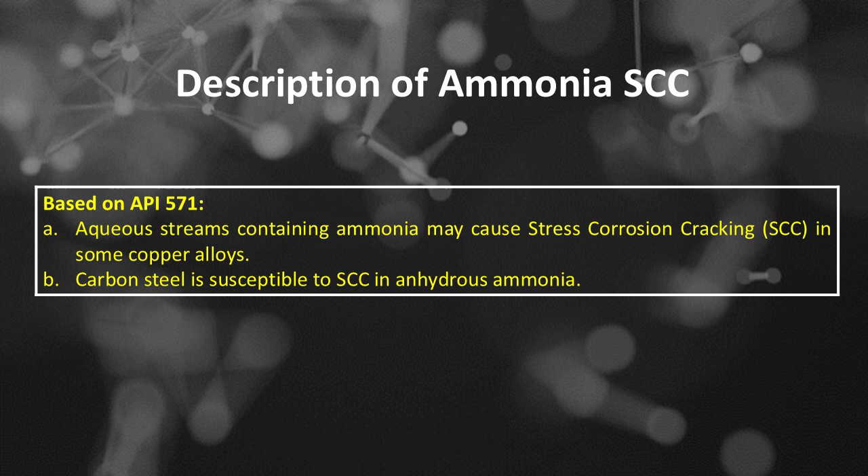Ammonia stress corrosion cracking, or ammonia SCC, damage. Introduction: Ammonia stress corrosion cracking is a form of environmentally assisted cracking that occurs in susceptible metals when exposed to ammonia-containing environments under tensile stress. It typically affects metals used in chemical processing, power generation, and other industrial applications where ammonia or related compounds are present. Mechanisms of ammonia stress corrosion cracking damage includes, number 1, environment.

Presence of ammonia, NH3, or ammonium compounds creates a corrosive environment. High pH conditions, an alkaline environment, facilitate ammonia's interaction with metal surfaces. Ammonia can penetrate crevices, weld zones, and deposit areas, creating localized corrosive environments.

Number 2, susceptible materials includes: A, commonly affected metals include carbon steels, low alloy steels, and certain austenitic stainless steels which are less susceptible but possible under specific conditions. B, more resistant materials include nickel alloys and some stainless steels with proper alloying elements. C, susceptibility factors: high residual or applied tensile stresses, presence of welds or heat-affected zones, and microstructural features such as grain boundaries.

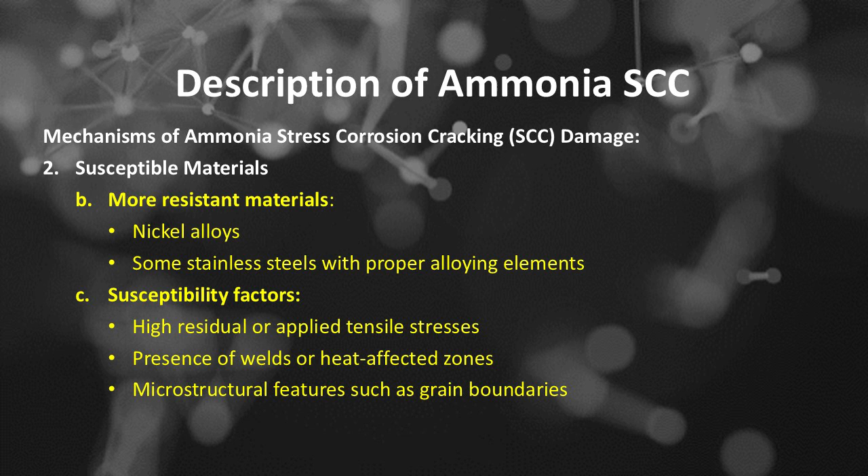Number 3 of mechanisms of ammonia stress corrosion cracking damage is the cracking process. A, cracks initiate at areas of high tensile stress, such as welds, bends, or residual stresses, and microstructural irregularities or corrosion pits act as crack initiation sites. B, cracks propagate along grain boundaries, intergranular, or transgranularly, facilitated by chemical attack.

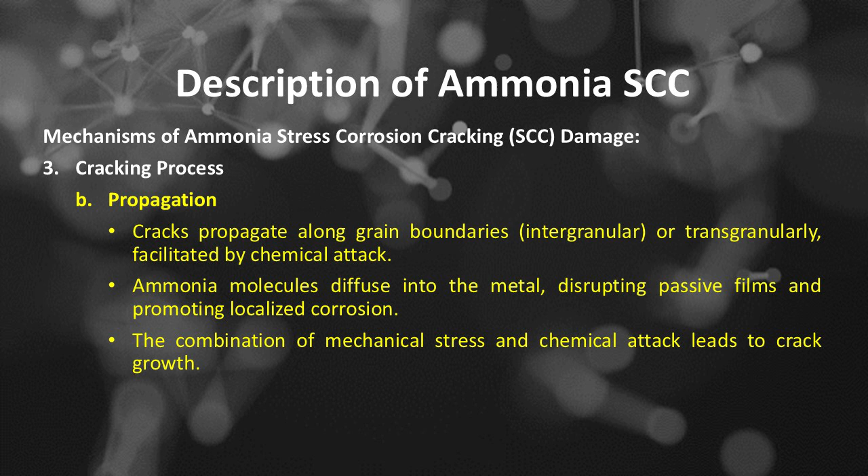Ammonia molecules diffuse into the metal, disrupting passive films and promoting localized corrosion. The combination of mechanical stress and chemical attack leads to crack growth.

Number 4, characteristics of ammonia SCC damage: crack morphology is typically intergranular, along grain boundaries, indicating an intergranular SCC mechanism. Cracks are often thin, brittle, and may have a faceted appearance under microscopic examination. Location of ammonia stress corrosion cracking damage often initiates in weld zones, crevices, or areas with residual stresses. Propagation tends to follow grain boundaries or microstructural features.

C, signs of ammonia stress corrosion cracking damage: evidence of grain boundary attack with corrosion products, presence of brittle intergranular cracks, and material thinning or localized deformation.

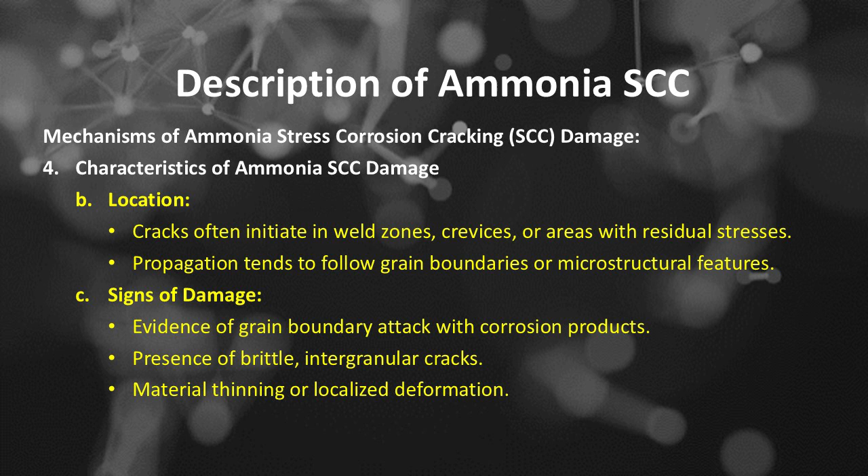Ammonia stress corrosion cracking is a hazardous, environmentally assisted failure mechanism characterized by intergranular or transgranular cracks initiated and propagated under tensile stress in ammonia-containing environments. The damage results from a combination of chemical attack, microstructural vulnerabilities, and mechanical stresses.

Prevention involves controlling water chemistry, selecting resistant materials, reducing residual and operational stresses, and implementing routine inspections to detect early signs of cracking. Ammonia stress corrosion cracking based on API 571, affected materials.

A, some copper alloys in environments with aqueous ammonia and/or ammonium compounds. B, carbon steel in anhydrous ammonia.

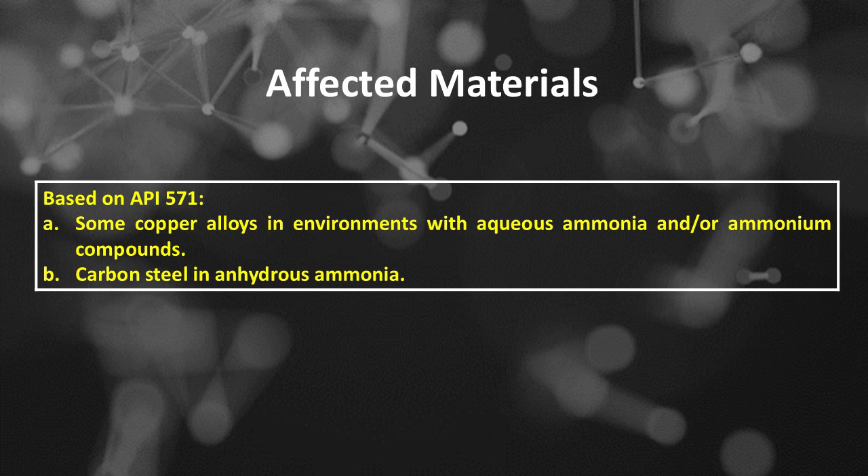Here's a detailed explanation of affected materials in ammonia stress corrosion cracking. Ammonia SCC primarily affects certain metals and alloys that are susceptible to chemical attack and stress-induced cracking in ammonia-rich environments. The susceptibility depends on the material's microstructure, composition, and environmental conditions. Materials affected by ammonia stress corrosion cracking.

Number 1, common susceptible materials includes: A, carbon steels. Widely used in piping, tanks, and structural components, composed mainly of iron with a carbon content typically below 0.3%. Carbon steel's susceptibility includes: highly susceptible to ammonia SCC, especially under tensile stress. Cracks often initiate at welds, heat-affected zones, or residual stress areas.

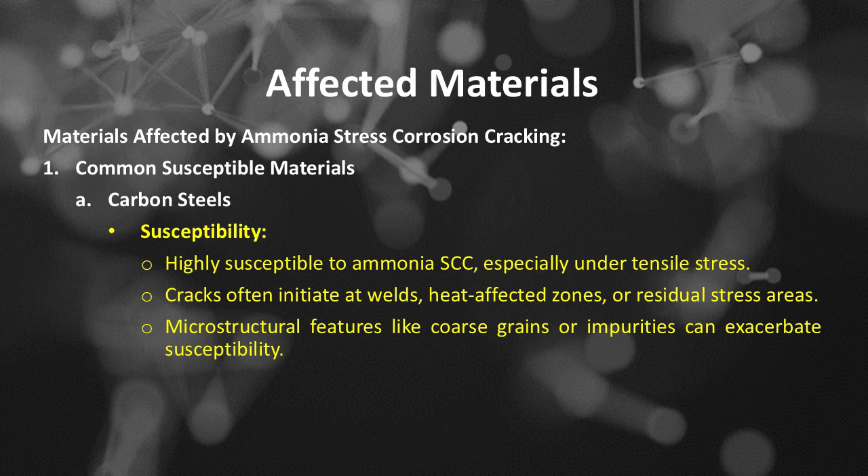Microstructural features like coarse grains or impurities can exacerbate susceptibility. Carbon steel's damage mechanisms includes: ammonia penetrates grain boundaries, leading to intergranular attack under stress. The passive film on steel can be disrupted by ammonia, promoting localized corrosion.

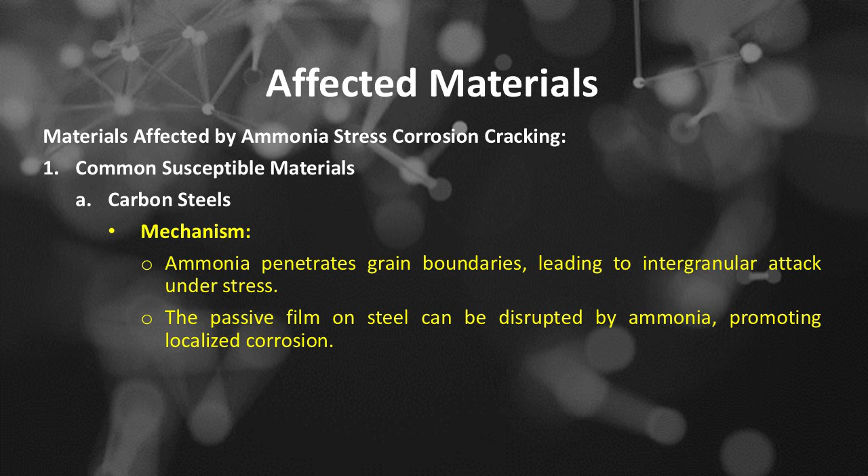B, low-alloy steels, for example chrome moly steels, such as 2.25Cr-1Mo, 3Cr-1Mo. The susceptibility of low-alloy steels includes: similar to carbon steels, but alloying elements may slightly modify resistance; generally more resistant than plain carbon steels but still vulnerable under high stress or ammonia concentrations.

C, austenitic stainless steels, for example types 304, 316, 321, 347. The susceptibility of austenitic stainless steels includes: less susceptible than plain carbon steels, however under certain conditions, high ammonia concentration, elevated temperature, or residual stresses, they become susceptible to ammonia SCC. Austenitic stainless steel's microstructural factors include sensitization, chromium carbide precipitation at grain boundaries, which can increase susceptibility.

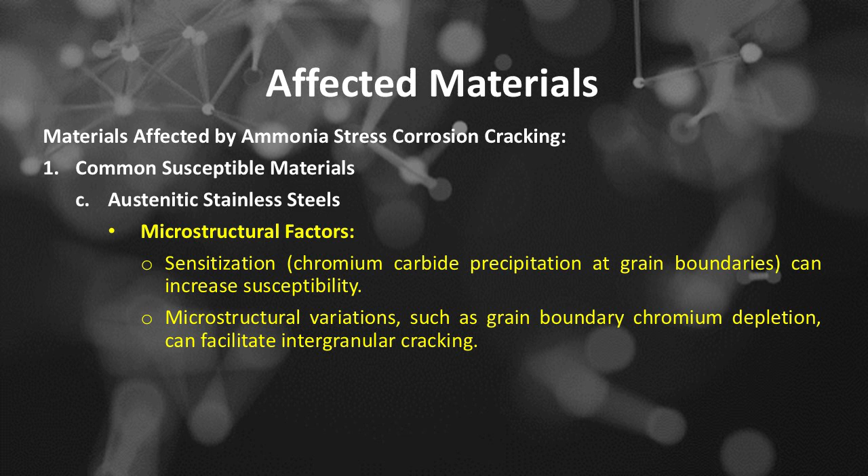Microstructural variations, such as grain boundary chromium depletion, can facilitate intergranular cracking. Common susceptible materials include nickel and nickel alloys, for example Inconel series such as Inconel 600 and 625.

Resistance of nickel and nickel alloys includes general resistance to ammonia SCC. The presence of nickel enhances corrosion resistance, making it suitable for environments with high ammonia concentrations.

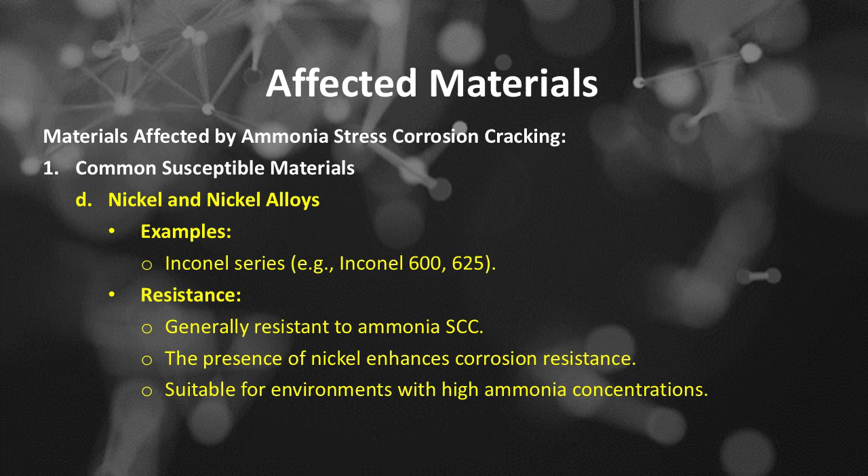Material microstructure and composition influences affecting ammonia stress corrosion cracking include, A, grain size. Fine-grained microstructures tend to be more resistant, while coarse grains can facilitate crack initiation and propagation along grain boundaries.

B, heat treatment state. Properly heat-treated materials with minimal residual stresses are less susceptible. Microstructural features like carbide precipitates can also influence susceptibility.

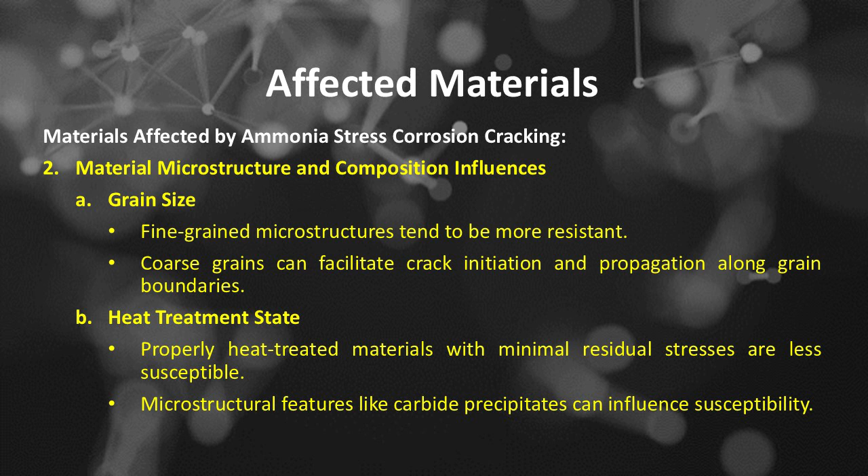C, impurities and microstructural defects. Impurities such as sulfur, phosphorus, or segregation at grain boundaries can weaken the material. Microvoids or inclusions act as initiation sites.

Environmental factors affecting material susceptibility include ammonia concentration, temperature, and pH, which influence the level of susceptibility of these materials.

Summary table: materials susceptible to ammonia SCC. Number 1 is carbon steel. It has high susceptibility; carbon steel is very vulnerable, especially under stress. In high ammonia environments, it corrodes rapidly. Implication: avoid using carbon steel in such conditions unless fully protected.

Number 2 is low alloy steels. It has moderate to high susceptibility. Susceptibility increases at welds and heat-affected zones, which are stress concentrators and weak points. Implication: requires strict welding quality control and inspection.

Number 3 is austenitic stainless steels. It has moderate susceptibility, generally better than carbon steel but not immune. Vulnerable when sensitized, such as by improper heat treatment. Implication: ensure proper fabrication and stress relief practices.

Number 4 is nickel alloys. It has low susceptibility, with excellent resistance in harsh environments, preferred for severe ammonia or corrosive service. Implication: higher cost, but long-term reliability.

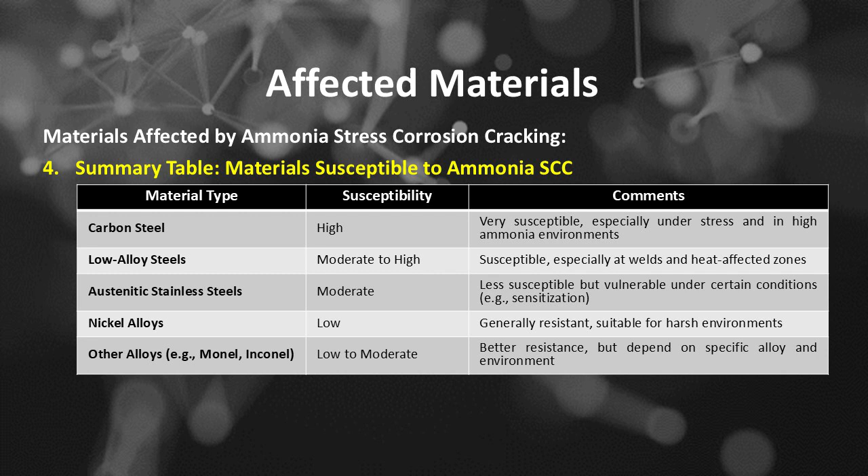Material selection is critical for components exposed to ammonia environments. Use of nickel-based alloys or specialized corrosion-resistant steels can significantly reduce susceptibility. Proper heat treatment, stress relief, and weld procedures help mitigate risks. Regular inspection and monitoring are essential for early detection of ammonia SCC in vulnerable materials.

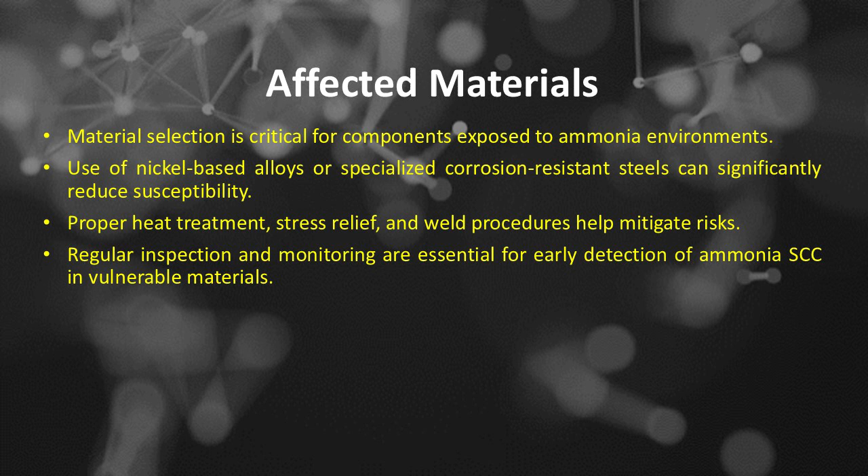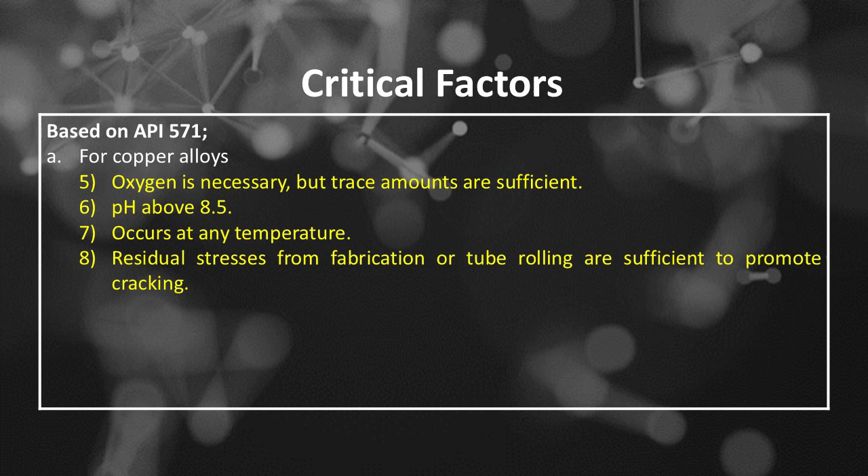Number 5, oxygen is necessary, but trace amounts are sufficient. Number 6, pH above 8.5. Number 7, occurs at any temperature. Number 8, residual stresses from fabrication or tube rolling are sufficient to promote cracking.

B, for steel, includes: number 1, anhydrous ammonia with less than 0.2% water may cause cracking in carbon steel. Number 2, cracking has been reported as low as -27 degrees Fahrenheit or -33 degrees Celsius in laboratory testing. Crack growth rates and cracking susceptibility increase with rising temperature and can occur at ambient or refrigerated conditions.

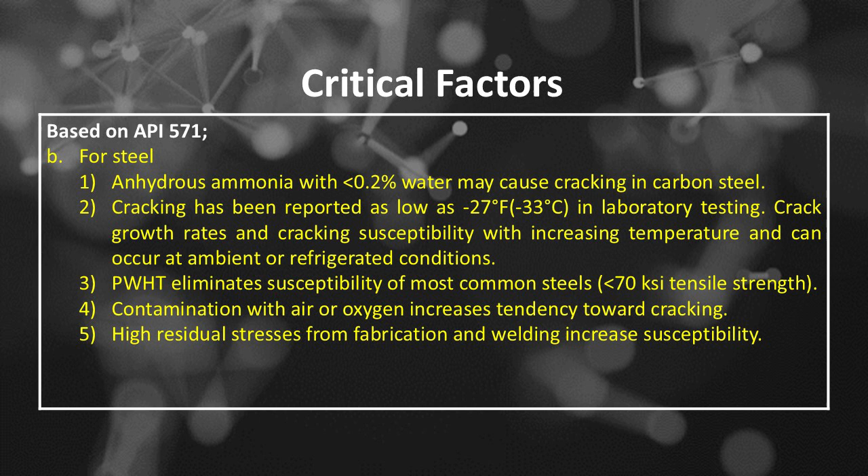Number 3, PWHT eliminates susceptibility of most common steels with tensile strength less than 70 ksi. Number 4, contamination with air or oxygen increases tendency toward cracking. Number 5, high residual stresses from fabrication and welding increase susceptibility.

Here's a comprehensive and detailed explanation of the critical factors that influence ammonia stress corrosion cracking damage. Ammonia SCC is a complex failure mechanism driven by a combination of environmental, material, and mechanical factors. The interplay of these factors determines the likelihood, initiation, and propagation of cracks. Understanding these critical factors is essential for prevention and mitigation.

Critical factors influencing ammonia stress corrosion cracking include, number 1, ammonia concentration and composition, A, ammonia content. High ammonia levels increase the aggressiveness of the environment. Ammonia molecules readily penetrate protective oxide films, disrupting passivity. Elevated ammonia concentrations, greater than several ppm, significantly raise the risk of SCC initiation and growth.

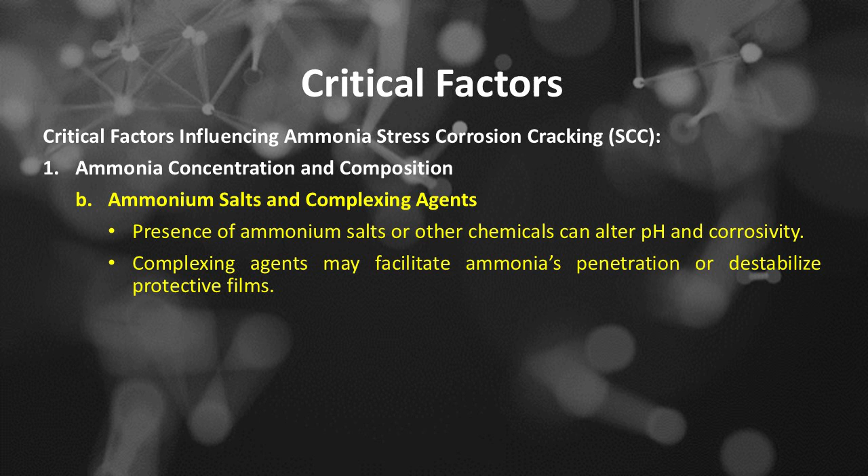B, ammonium salts and complexing agents. Presence of ammonium salts or other chemicals can alter pH and corrosivity. Complexing agents may facilitate ammonia's penetration or destabilize protective films.

Critical factors, number 2, temperature, A, elevated temperatures. Increased temperature accelerates chemical reactions, diffusion of ammonia into the metal, and crack propagation.

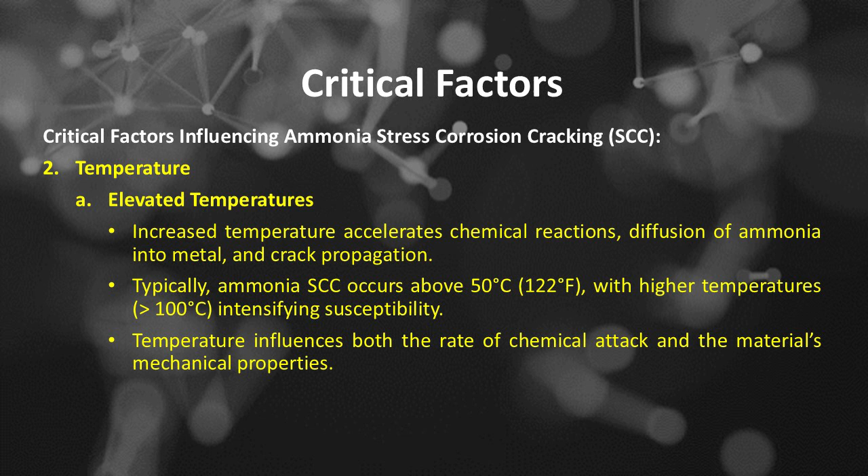Typically, ammonia SCC occurs above 50 degrees Celsius or 122 degrees Fahrenheit, with higher temperatures, greater than 100 degrees Celsius, intensifying susceptibility. Temperature influences both the rate of chemical attack and the material's mechanical properties. Thermal cycling: fluctuations in temperature can induce thermal stresses, exacerbating crack initiation.

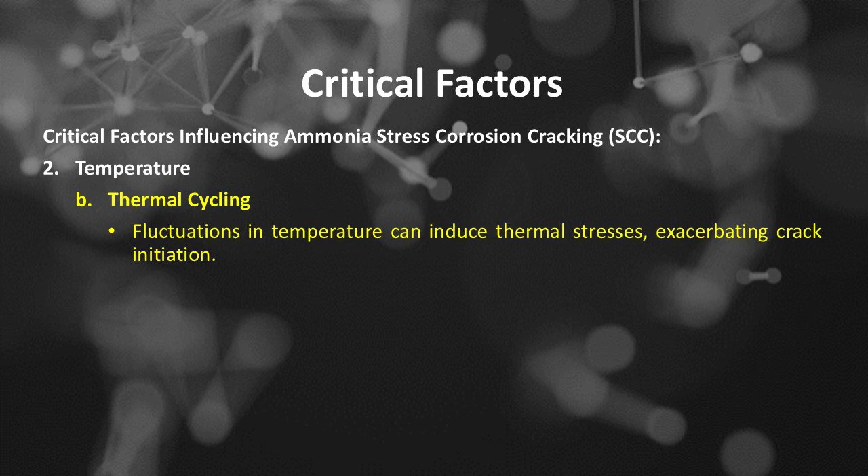Critical factor number 3 is mechanical stress, including tensile stress. Applied tensile stresses exceeding the material's yield strength, or residual stresses from fabrication, are critical. Even low levels of tensile stress can initiate cracks if environment and microstructure are conducive. Stress concentrations at welds, corrosion pits, or geometric discontinuities greatly increase local stress intensity.

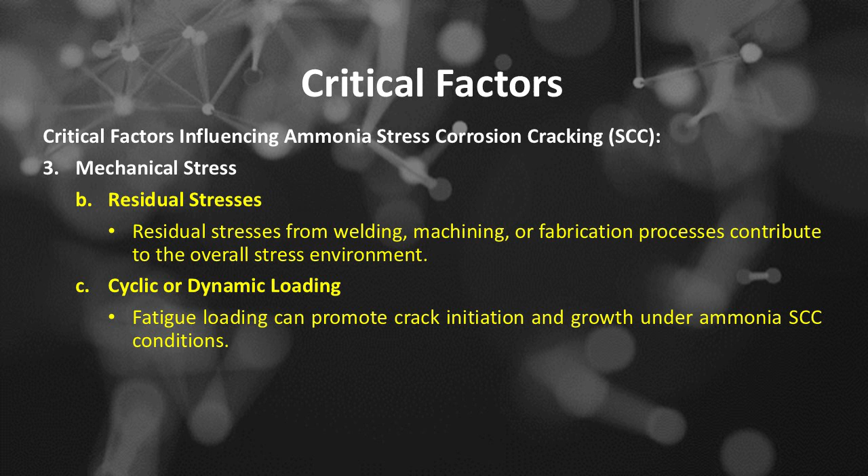Residual stresses from welding, machining, or fabrication processes contribute to the overall stress environment. Cyclic or dynamic loading: fatigue loading can promote crack initiation and growth under ammonia SCC conditions.

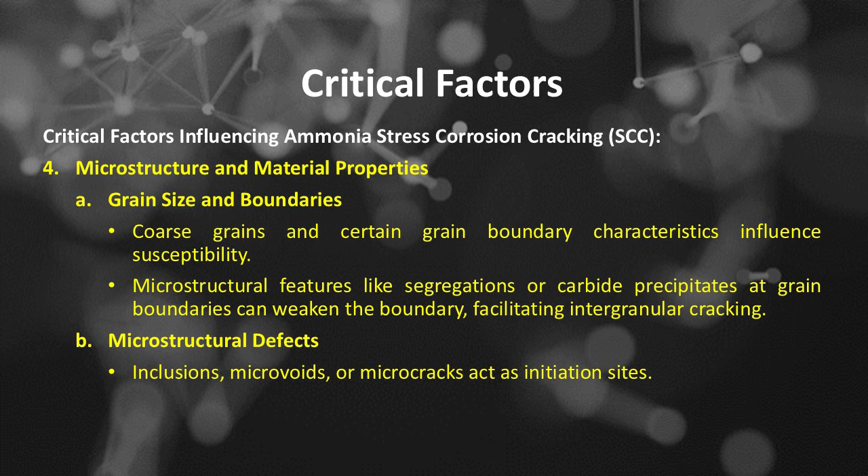Critical factor number 4 is microstructure and material properties, including grain size and boundaries. Coarse grains and certain grain boundary characteristics influence susceptibility. Microstructural features like segregations or carbide precipitates at grain boundaries can weaken the boundary, facilitating intergranular cracking. Microstructural defects, such as inclusions, microvoids, or microcracks, act as initiation sites.

Material composition: materials with certain alloying elements, such as high carbon or sensitization in stainless steels, are more vulnerable. Nickel alloys and austenitic stainless steels with proper microstructure are more resistant.

Critical factor number 5 is environment and water chemistry, including pH levels. Ammonia environments are typically alkaline, with pH greater than 8, which can destabilize passive films. High pH environments favor ammonia SCC.

Presence of oxygen or other gases: oxygen can influence corrosion processes, but in ammonia SCC, the environment is often low in oxygen. The absence of oxygen may promote more localized, intergranular attack.

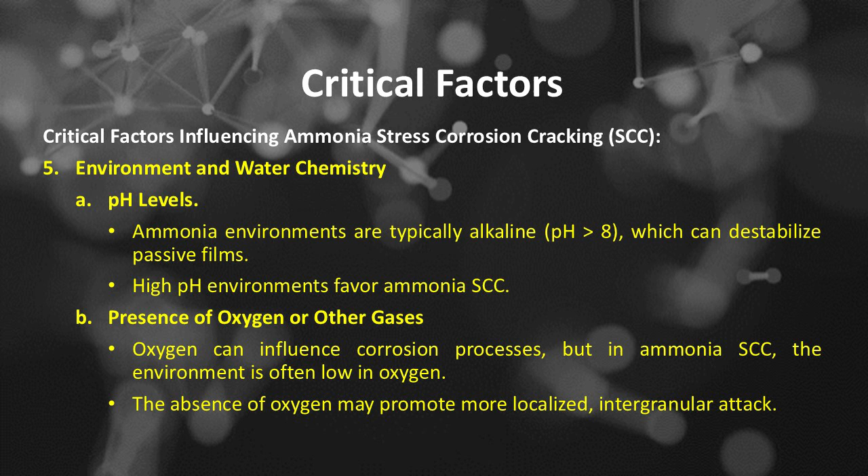Deposits and crevices: deposits or crevices trap ammonia, creating localized aggressive conditions. These microenvironments elevate the risk of crack initiation.

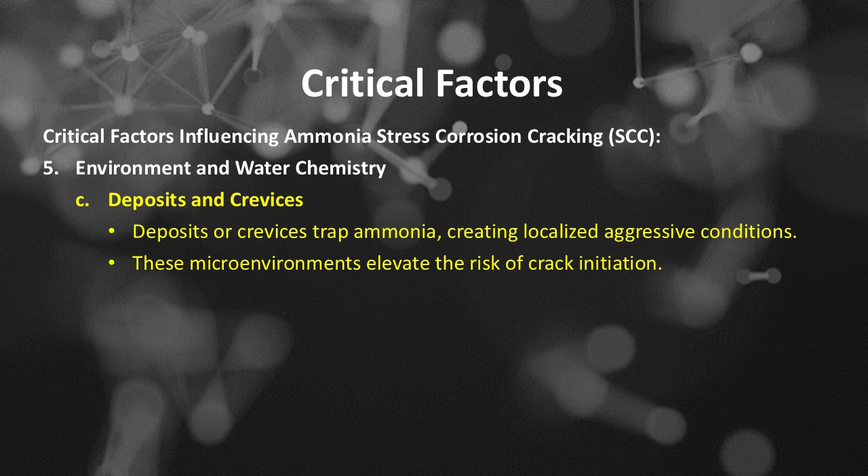Critical factor number 6 is environmental and operational conditions, including duration of exposure. Longer exposure times increase the likelihood of crack initiation and propagation.

Water chemistry control: proper control of ammonia concentration, pH, and temperature reduces risk. System design: avoidance of tight bends, welds, or residual stress zones minimizes stress concentrations and microstructural irregularities.

Critical factor number 7 is additional factors influencing ammonia stress corrosion cracking, including weld quality and residual stresses. Poor welds with high residual stresses are more prone to SCC initiation. Surface conditions: surface roughness, corrosion pits, or deposits increase initiation sites.

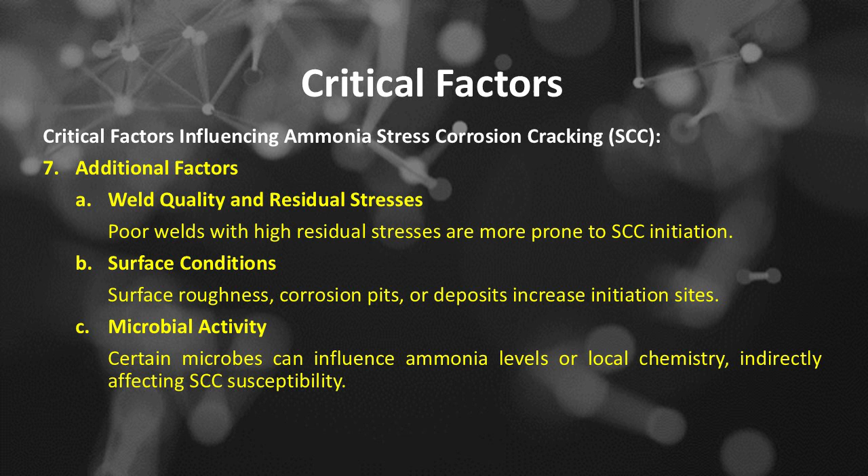Microbial activity: certain microbes can influence ammonia levels or local chemistry, indirectly affecting SCC susceptibility. The critical factors for ammonia SCC damage are interconnected; their combined effects determine the likelihood and severity of cracking. Controlling ammonia levels, managing stresses, selecting resistant materials, and maintaining proper system design are essential strategies to mitigate the risk of ammonia SCC.

Ammonia stress corrosion cracking damage affects units or equipment based on API 571: copper zinc alloy tubes in heat exchangers; ammonia present as a process contaminant in some services, or intentionally added as an acid neutralizer; and carbon steel used for ammonia storage tanks, piping, and equipment in ammonia refrigeration units, as well as some lube oil refining processes.

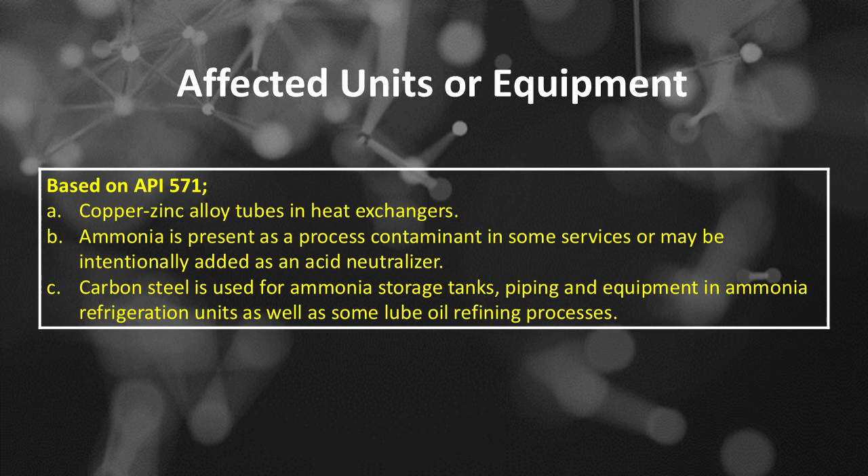Here's a detailed explanation of the affected units or equipment that are susceptible to ammonia stress corrosion cracking damage. Ammonia SCC can occur in various units and equipment within industries where ammonia is used, processed, or stored. The susceptibility depends on the operational environment, material selection, and design features.

Affected units and equipment in ammonia stress corrosion cracking include: 1) piping systems, including ammonia supply and distribution lines that transport ammonia from storage to process units. Vulnerabilities include stress concentration points at elbows, tees, or welds, and microstructural irregularities or residual stresses from fabrication. The impact: cracks initiating and propagating along the pipe walls, potentially leading to leaks or catastrophic failure.

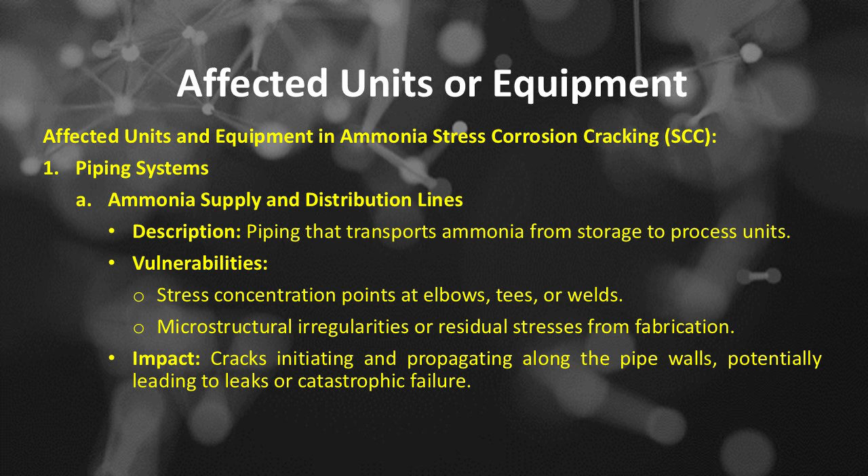Piping systems, number B, process piping: this is the piping involved in reactor feed, process loops, or heat exchangers. Vulnerabilities include elevated temperatures and ammonia concentrations, and cyclic stresses from thermal expansion. The impact would be localized cracking, especially near welds or bends.

Number 2 of affected units and equipment in ammonia stress corrosion cracking is storage tanks and vessels, including ammonia storage tanks.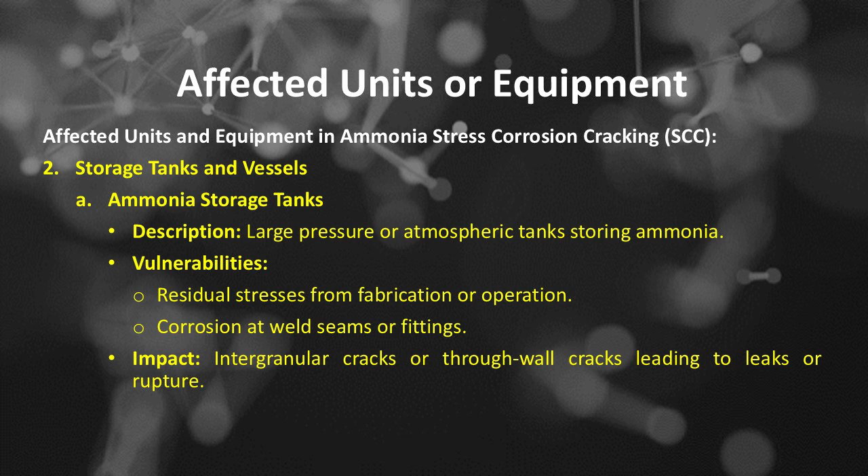Large pressure or atmospheric tanks storing ammonia. The vulnerabilities of these ammonia storage tanks include residual stresses from fabrication or operation, and corrosion at weld seams or fittings. The impact would be intergranular cracks or through-wall cracks leading to leaks or rupture.

Number B, reactor vessels, using ammonia in chemical processes. The vulnerabilities include high internal stresses during operation and microstructural conditions favoring SCC. The impact would be cracks affecting structural integrity and process safety.

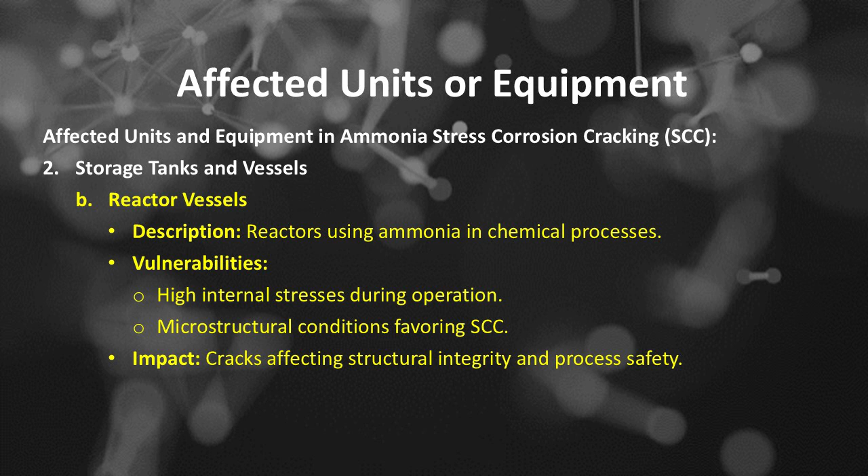Number 3 of affected units and equipment in ammonia stress corrosion cracking is shell and tube heat exchangers. This equipment transfers heat between ammonia and other process streams. The vulnerabilities include stress from thermal cycling and localized corrosion in crevices. The impact would be crack initiation at welds or tube attachments, risking leaks.

Number 4 of affected units and equipment is valves and fittings. These control ammonia flow, pressure-reducing devices, and fittings. The vulnerabilities include stress concentrations due to design features and microstructural irregularities from manufacturing. The impact would be cracks propagating from stress points, leading to leaks or failures.

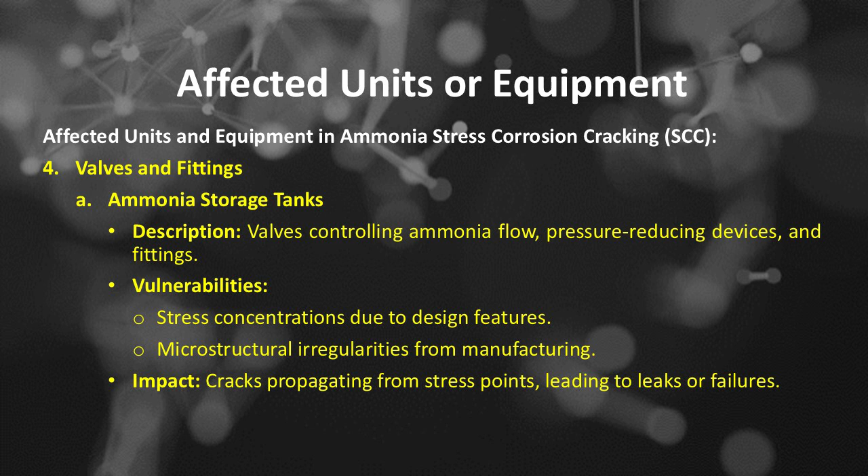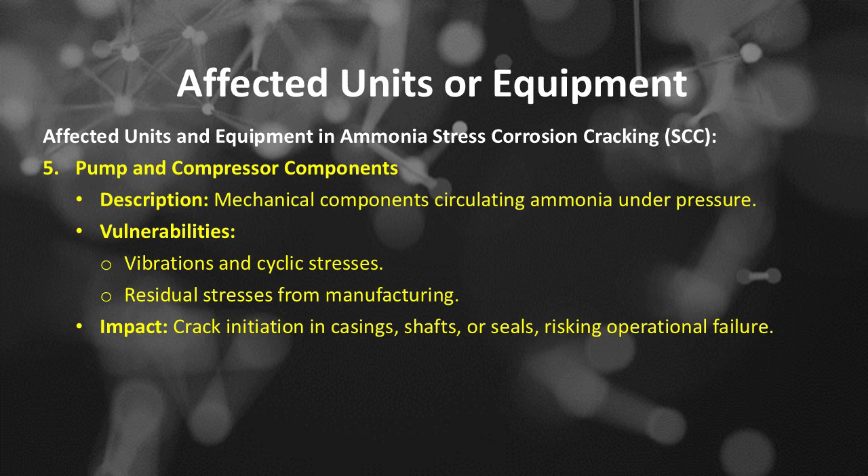Number 5 of affected units and equipment is pump and compressor components. These mechanical components circulate ammonia under pressure. The vulnerabilities include vibrations and cyclic stresses, and residual stresses from manufacturing. The impact would be crack initiation in casings, shafts, or seals, risking operational failure.

Number 6 of affected units and equipment is heat transfer surfaces and linings. These are surfaces in contact with ammonia, such as in scrubbers or absorbers. The vulnerabilities include surface corrosion due to ammonia exposure and microcracks from thermal or mechanical stresses. The impact would be progressive cracking leading to leaks or equipment failure.

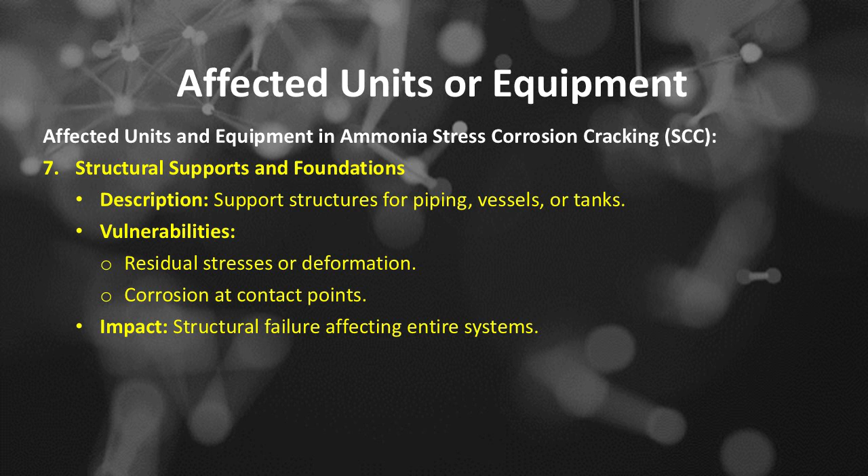Number 7 of affected units and equipment is structural supports and foundations, which support structures for piping, vessels, or tanks. The vulnerabilities include residual stresses or deformation, and corrosion at contact points. The impact would be structural failure affecting entire systems.

Key points: welded joints and stress concentration zones are common sites for ammonia SCC initiation. High temperature zones and areas with residual stresses are particularly vulnerable. Regular inspection, non-destructive testing (NDT), and material monitoring are critical for early detection.

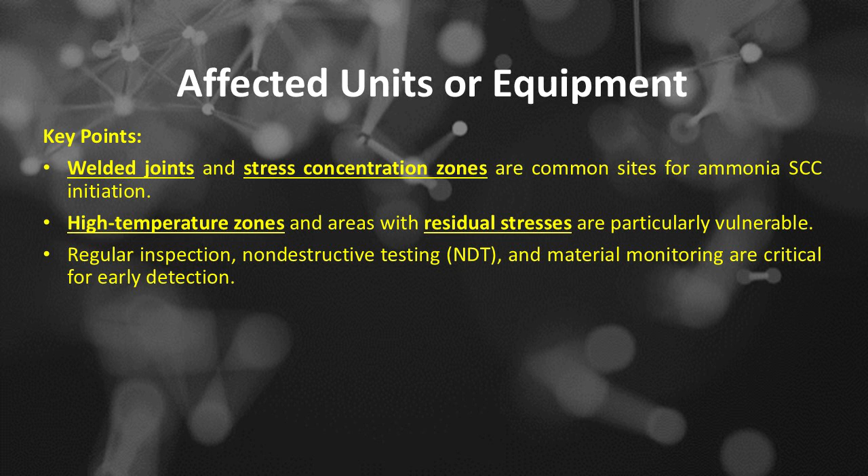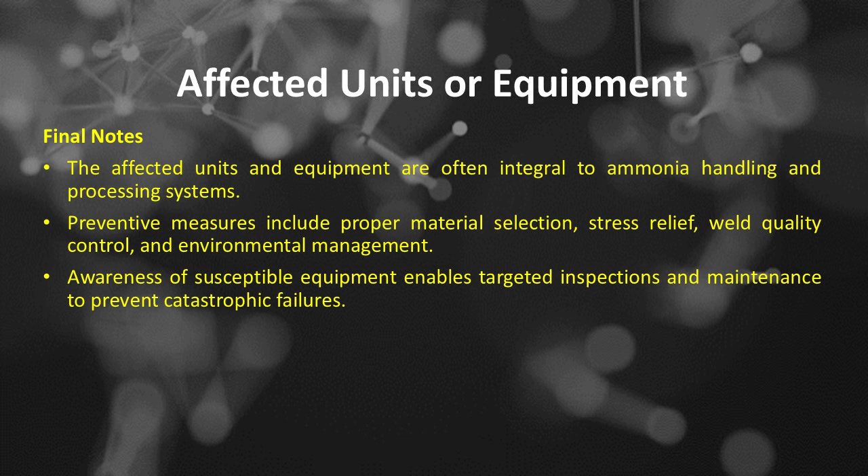Final notes: the affected units and equipment are often integral to ammonia handling and processing systems. Preventive measures include proper material selection, stress relief, weld quality control, and environmental management. Awareness of susceptible equipment enables targeted inspections and maintenance to prevent catastrophic failures.

Ammonia stress corrosion cracking appearance or morphology of damage based on API 571, number A, copper alloys, includes: number 1, surface breaking cracks may show bluish corrosion products. Number 2, exchanger tubes show single or highly branched cracks on the surface. Number 3, cracking can be either transgranular or intergranular, depending on the environment and stress level.

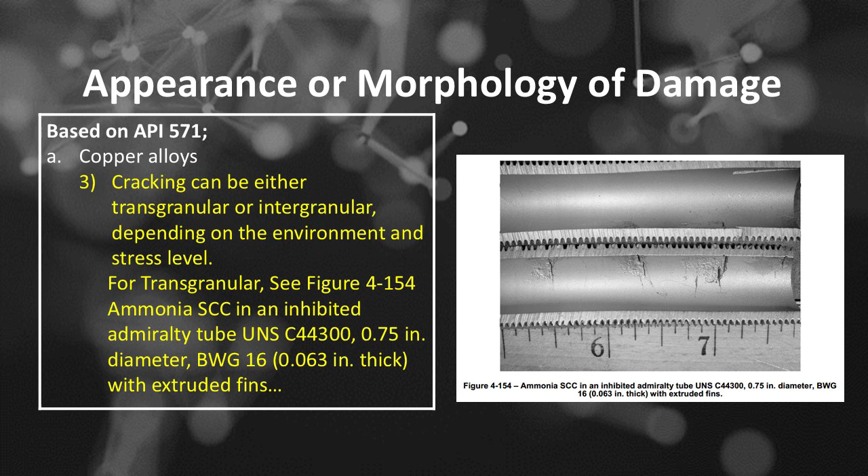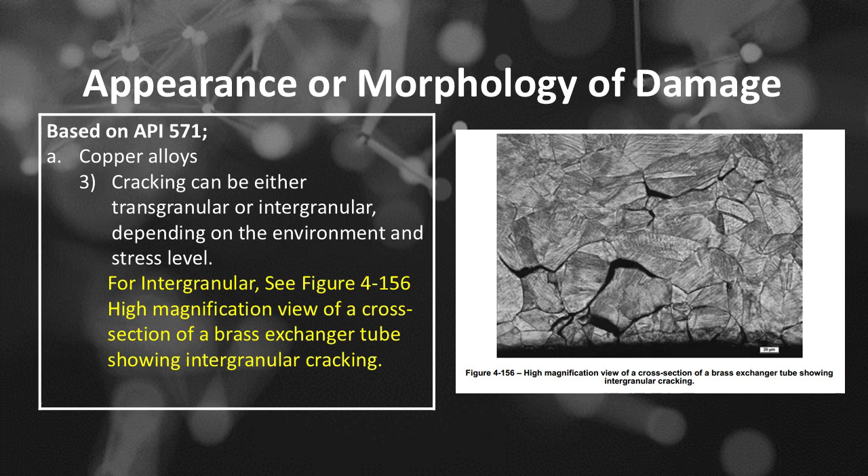Ammonia stress corrosion cracking critical factors based on API 571, number B, for carbon steel, includes: number 1, cracking will occur at exposed non-PWHT welds and heat-affected zones. Number 2, cracking is primarily intergranular in nature.

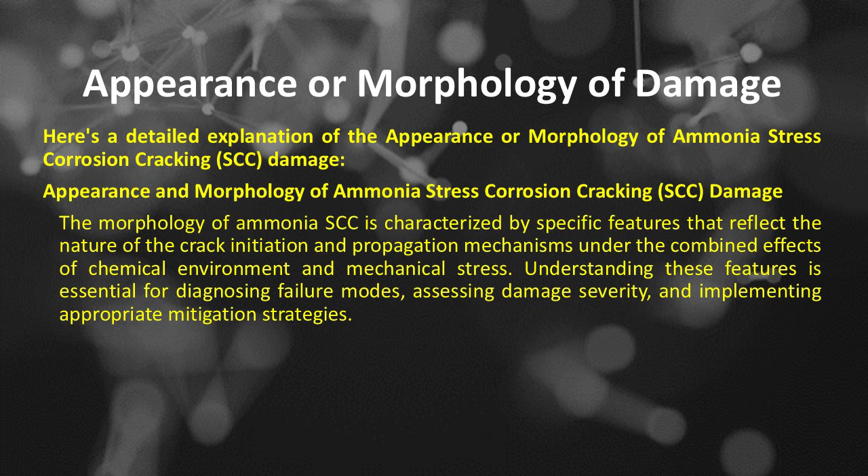Here's a detailed explanation of the appearance or morphology of ammonia stress corrosion cracking damage. The morphology of ammonia SCC is characterized by specific features that reflect the nature of crack initiation and propagation mechanisms under the combined effects of chemical environment and mechanical stress. Understanding these features is essential for diagnosing failure modes, assessing damage severity, and implementing appropriate mitigation strategies.

Appearance and morphology of ammonia stress corrosion cracking (SCC) damage includes: number 1, general morphological features, including number A, intergranular versus transgranular nature.

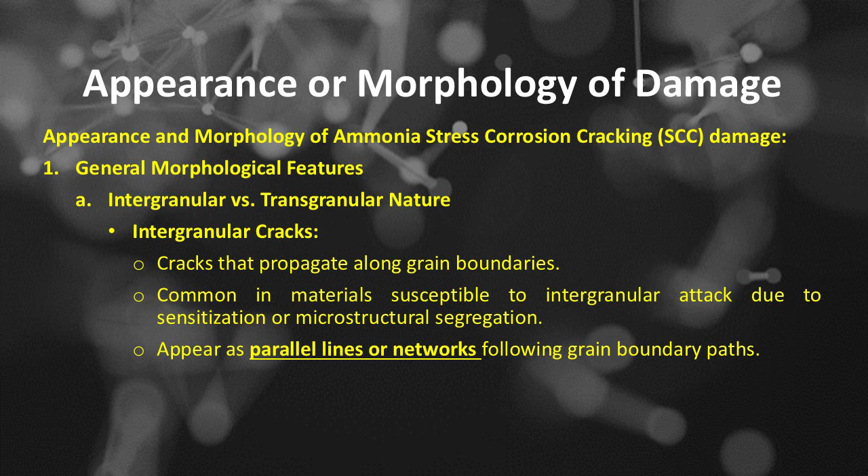For intergranular cracks, cracks that propagate along grain boundaries, common in materials susceptible to intergranular attack due to sensitization or microstructural segregation, appear as parallel lines or networks following grain boundary paths. For transgranular cracks, cracks that cut through grains, crossing grain boundaries, are less common in ammonia SCC but can occur under certain conditions, often appearing as rough, jagged cracks traversing grain interiors.

General morphological features: crack morphology. For brittle, cleavage-like appearance, cracks often exhibit a brittle fracture morphology, with smooth, flat facets indicative of cleavage or intergranular fracture. The fracture surface may be smooth and shiny, reflecting brittle failure.

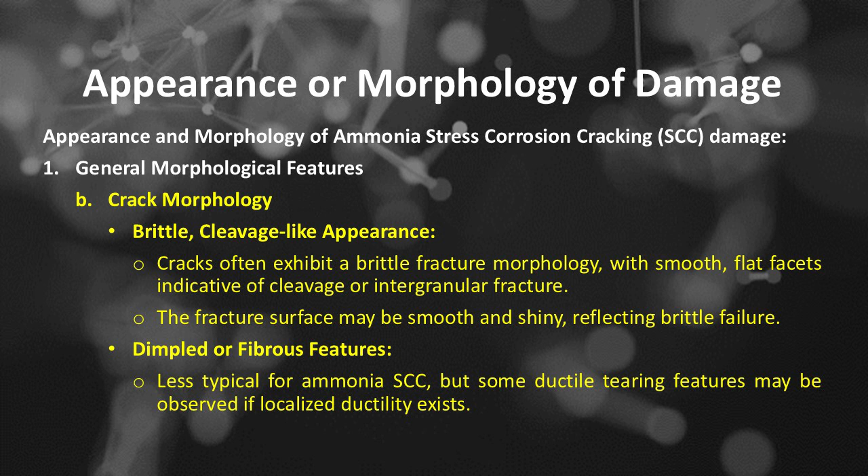General morphological features: crack morphology. For brittle, cleavage-like appearance, cracks often exhibit a brittle fracture morphology, with smooth, flat facets indicative of cleavage or intergranular fracture. The fracture surface may be smooth and shiny, reflecting brittle failure. For dimpled or fibrous features, less typical for ammonia SCC, but some ductile tearing features may be observed if localized ductility exists. This covers the appearance and morphology of ammonia stress corrosion cracking damage.

Number 2 is surface features of ammonia SCC. Number A, crack initiation sites, usually associated with microstructural irregularities, such as inclusions, carbides, or microvoids. Initiation may occur at corrosion pits or microcracks, often visible as small, localized damage zones.

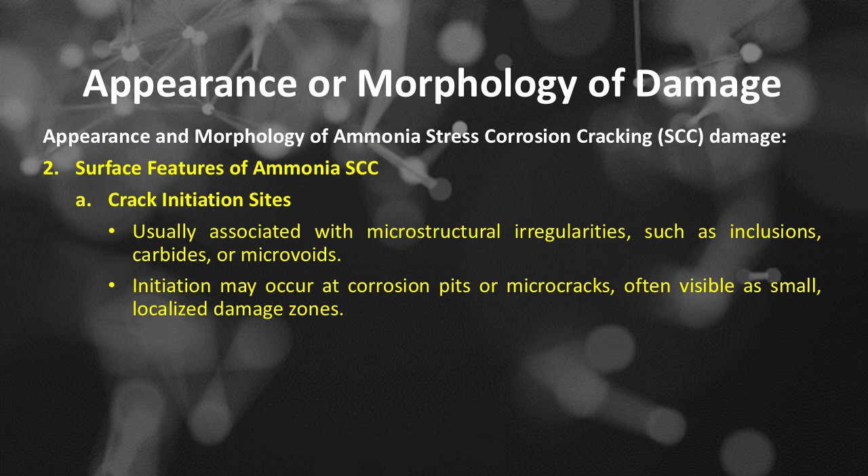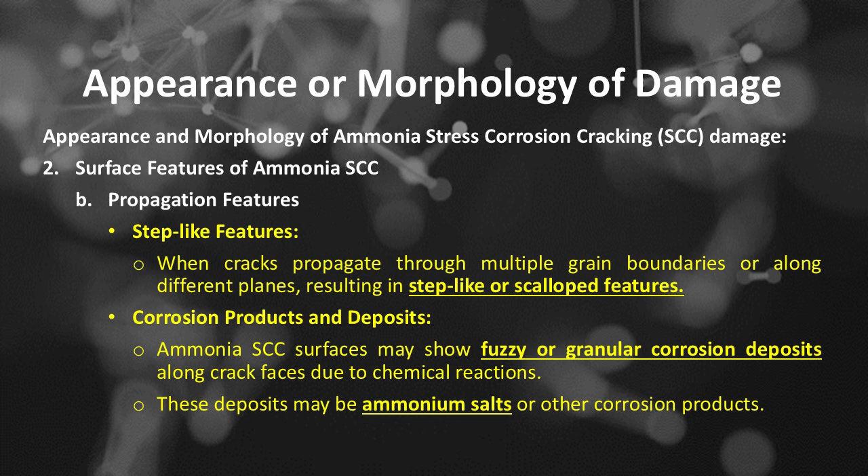Surface features of ammonia SCC. Number B is propagation features, includes flat, planar fracture surfaces, indicative of intergranular cracking, characterized by a smooth, mirror-like finish along the crack path. For step-like features, when cracks propagate through multiple grain boundaries or along different planes, resulting in step-like or scallop features. And for corrosion products and deposits, ammonia SCC surfaces may show fuzzy or granular corrosion deposits along crack faces due to chemical reactions. These deposits may be ammonium salts or other corrosion products.

Appearance and morphology of ammonia stress corrosion cracking damage. Number 3 is microstructural morphology, includes, number A, crack path, often follows grain boundaries, resulting in intergranular crack paths. The crack may branch or bifurcate along different grain boundary planes. Number B, fracture surface exhibits features characteristic of brittle fracture, a faceted appearance with smooth cleavage facets, and the presence of intergranular cracks with step-like features at grain boundaries.

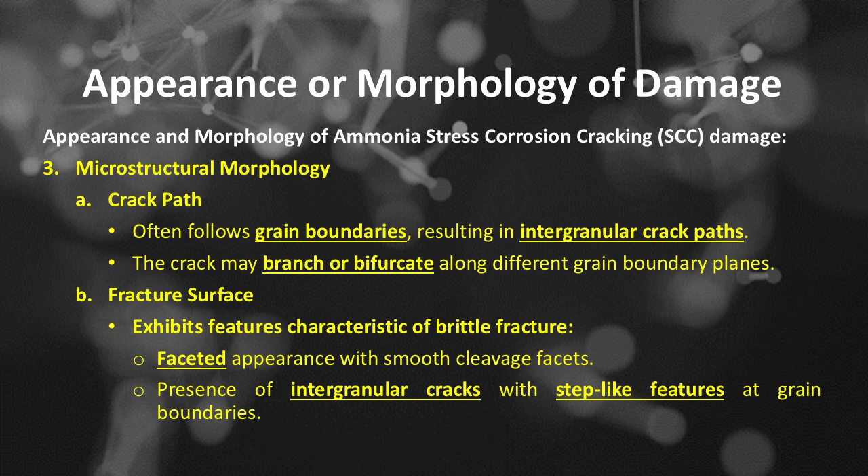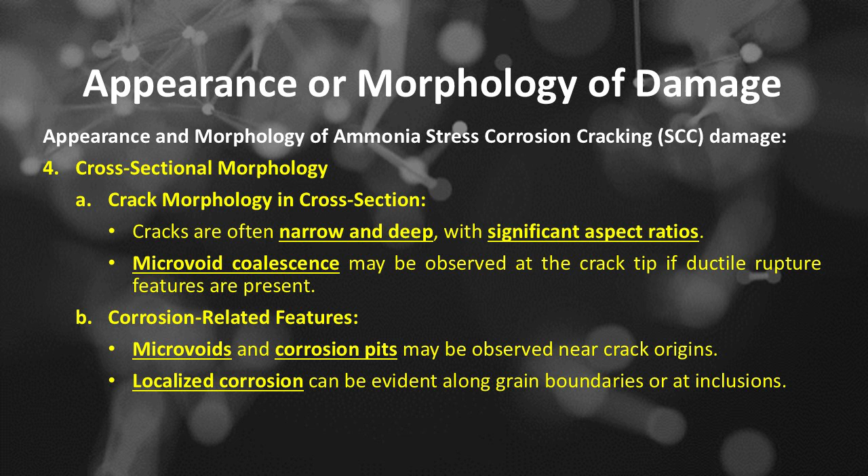Cross-sectional morphology, number B is corrosion-related features. Microvoids and corrosion pits may be observed near crack origins. Localized corrosion can be evident along grain boundaries or at inclusions. The morphology of ammonia SCC damage is often intergranular and brittle, with smooth, planar fracture surfaces that follow grain boundaries. The presence of corrosion deposits and microstructural irregularities can help identify SCC damage versus other failure modes like ductile overload.

Ammonia stress corrosion cracking damage prevention and mitigation based on API 571. Number A, copper alloys, includes: number 1, copper-zinc alloys show improved resistance as zinc content decreases below 15%. Number 2, the 90-10 CuNi and 70-30 CuNi alloys are nearly immune. Number 3, SCC in steam service can sometimes be controlled by preventing the ingress of air. Number 4, 300 series SS and nickel-base alloys are immune.

Number B, carbon steel. Number 1, SCC of steel can be prevented through the addition of small quantities of water to the ammonia, 0.2% minimum. Consideration must be given to vapor spaces, which could have less than 0.2% water present due to partitioning of ammonia in the water phase. Number 2, an effective PWHT of the vessel reduces residual stress to the point where ammonia SCC can be prevented. Number 3, low-strength steels, less than 70 ksi tensile strength, should be used.

Number 4, weld hardness should not exceed 225 BHN. Number 5, prevent ingress of oxygen into storage facilities. Low levels of oxygen, less than 10 ppm, have been reported to lead to cracking under some conditions.

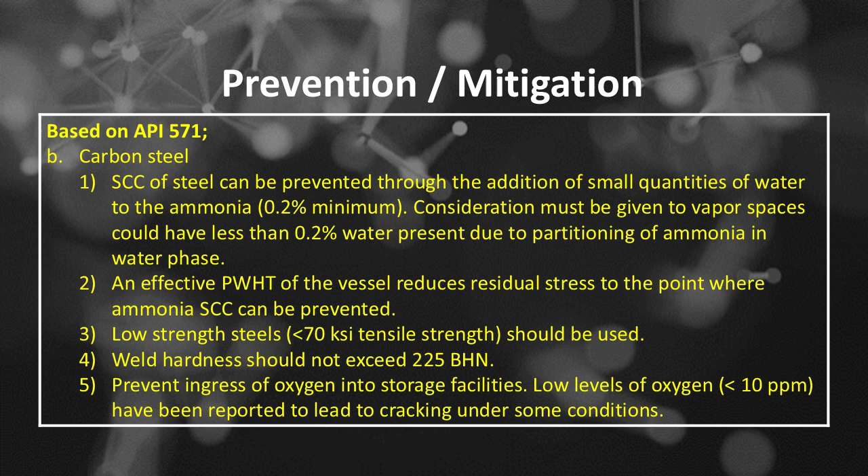Here's a comprehensive and detailed explanation of prevention and mitigation strategies for ammonia stress corrosion cracking. Preventing ammonia SCC involves controlling environmental, material, operational, and maintenance parameters to reduce the likelihood of crack initiation and propagation. Effective mitigation combines proactive design, material selection, process control, and inspection strategies.

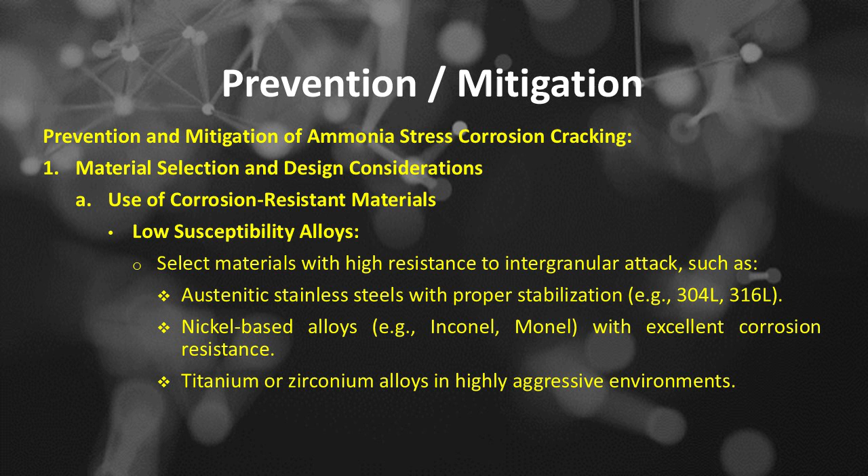Prevention and mitigation of ammonia stress corrosion cracking includes: number 1, material selection and design considerations, includes number A, use of corrosion-resistant materials, includes the first being low susceptibility alloys. Select materials with high resistance to intergranular attack, such as austenitic stainless steels with proper stabilization, for example 304L, 316L; nickel-based alloys, e.g. Inconel, Monel, with excellent corrosion resistance; and titanium or zirconium alloys in highly aggressive environments.

The second of corrosion-resistant materials is avoid susceptible microstructures, use materials free from sensitization, for example avoid high-carbon steels prone to carbide precipitation at grain boundaries. Material selection and design considerations.

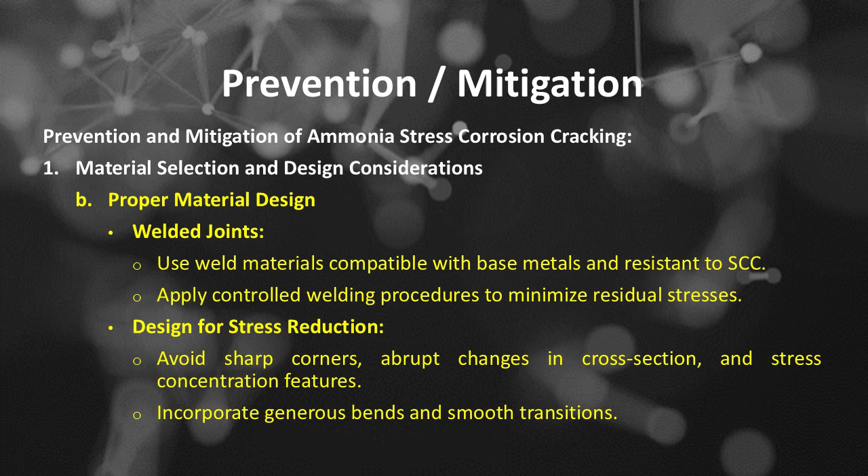Number B is proper material design, includes, the first is welded joints, use weld materials compatible with base metals and resistant to SCC, apply controlled welding procedures to minimize residual stresses. The second is design for stress reduction, avoid sharp corners, abrupt changes in cross-section, and stress concentration features. Incorporate generous bends and smooth transitions.

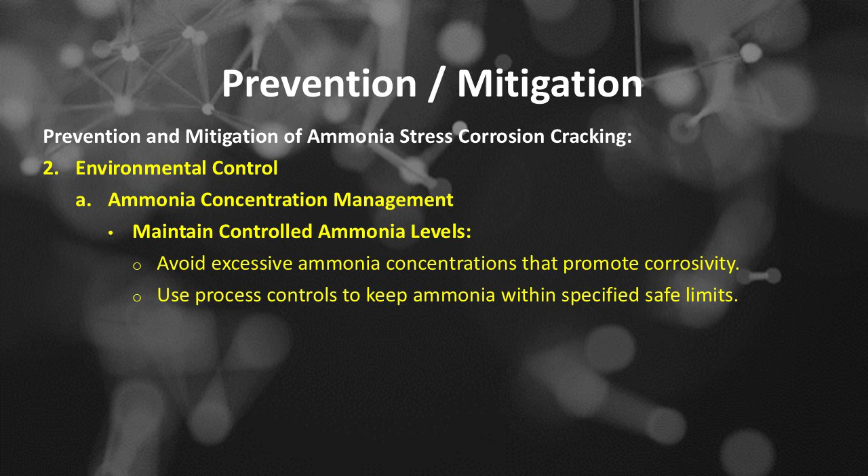Prevention and mitigation of ammonia stress corrosion cracking. Number 2 is environmental control, includes, number A, ammonia concentration management, maintain controlled ammonia levels, avoid excessive ammonia concentrations that promote corrosivity, use process controls to keep ammonia within specified safe limits.

Environmental control. Number B is pH and temperature control, includes, the first is maintain optimal pH levels, keep the environment within a pH range that minimizes susceptibility, typically neutral to slightly alkaline, and the second is temperature control, operate at temperatures that do not favor SCC, avoid high temperature excursions.

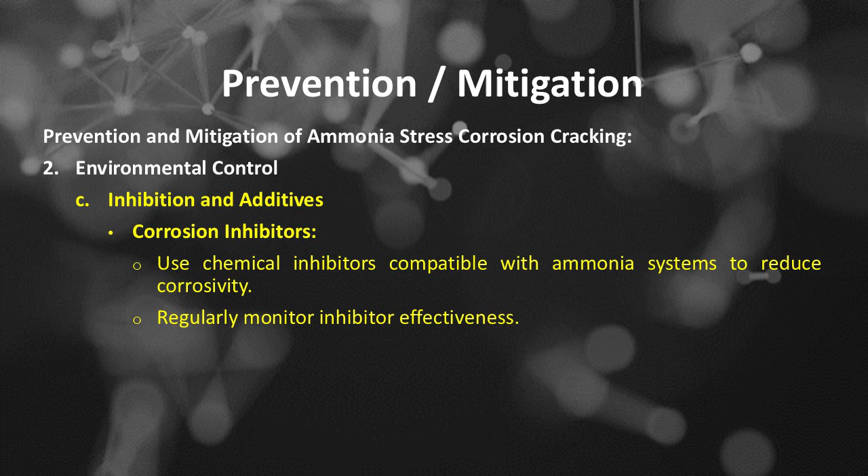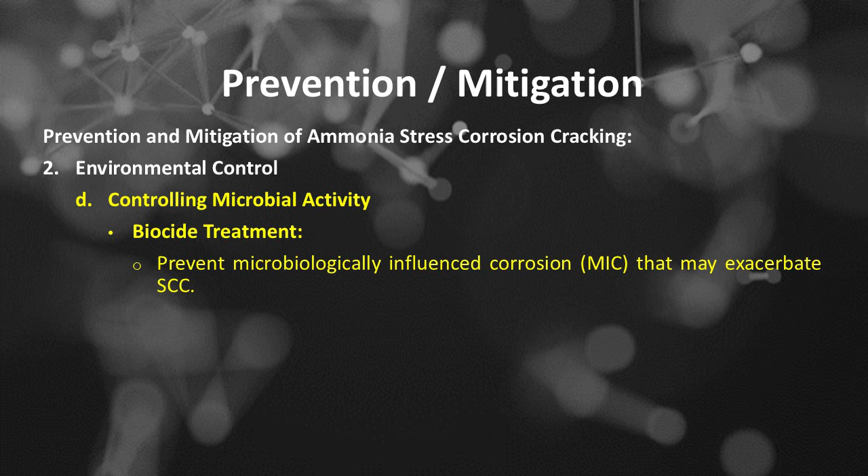Environmental control. Number C is inhibition and additives, commonly using corrosion inhibitors, use chemical inhibitors compatible with ammonia systems to reduce corrosivity. Regularly monitor inhibitor effectiveness. Number D is controlling microbial activity using biocide treatment, prevent microbiologically influenced corrosion that may exacerbate SCC.

Prevention and mitigation of ammonia stress corrosion cracking. Number 3 is operational practices, includes, number A, stress management. Reduce mechanical stresses by implementing proper stress relief procedures post-welding or fabrication, and minimize residual stresses through heat treatment or stress relief annealing.

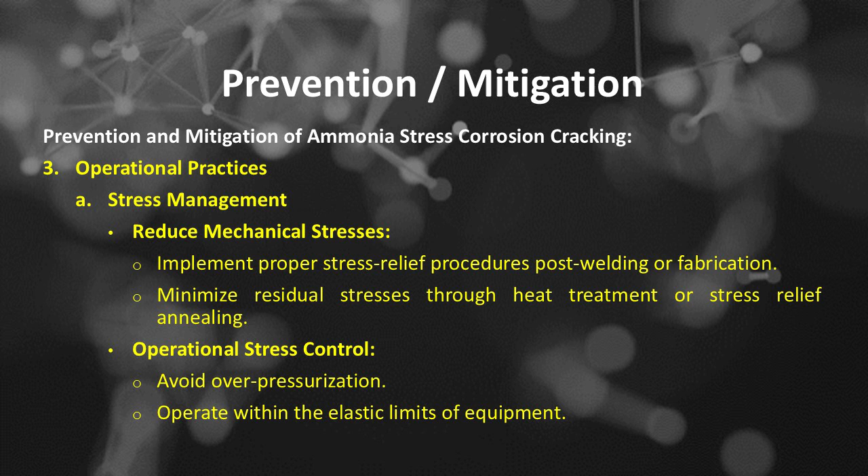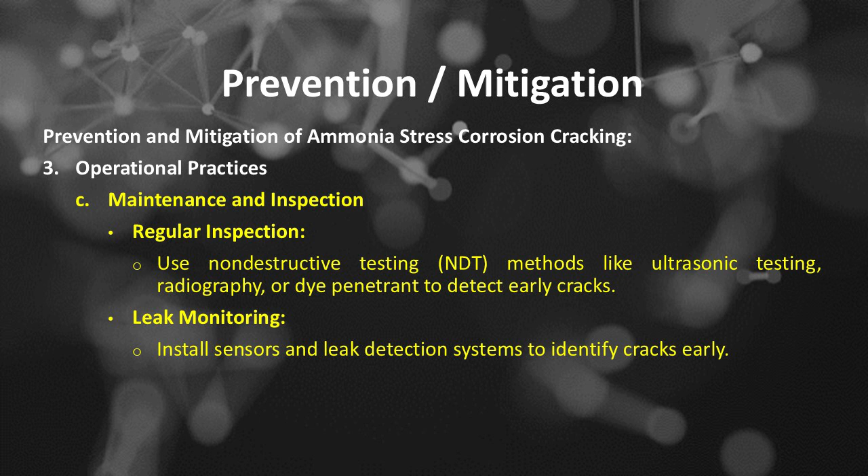Operational practices. Number C is maintenance and inspection, includes, the first is regular inspection, use non-destructive testing, NDT, methods like ultrasonic testing, radiography, or dye penetrant to detect early cracks. The second is leak monitoring, install sensors and leak detection systems to identify cracks early.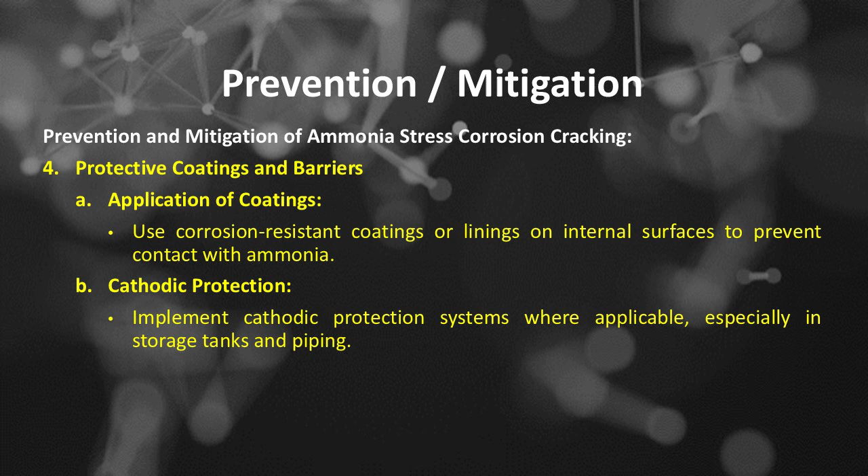Prevention and mitigation of ammonia stress corrosion cracking. Number 4 is protective coatings and barriers, includes, number A, application of coatings, use corrosion-resistant coatings or linings on internal surfaces to prevent contact with ammonia. Number B, cathodic protection, implement cathodic protection systems where applicable, especially in storage tanks and piping.

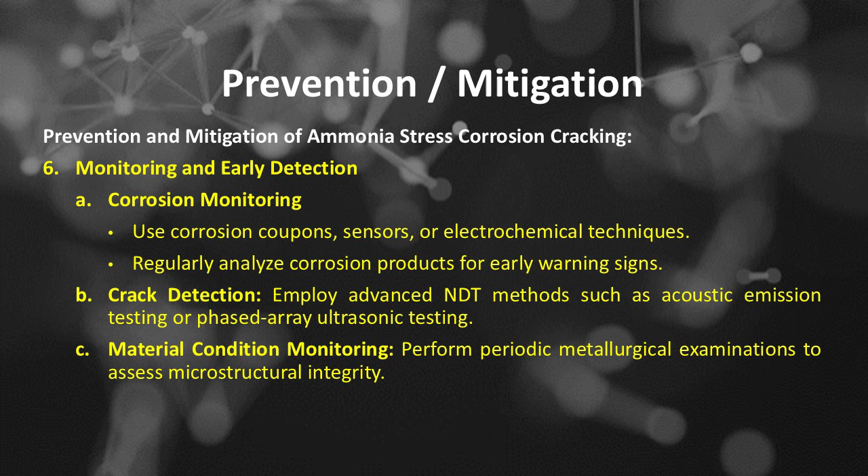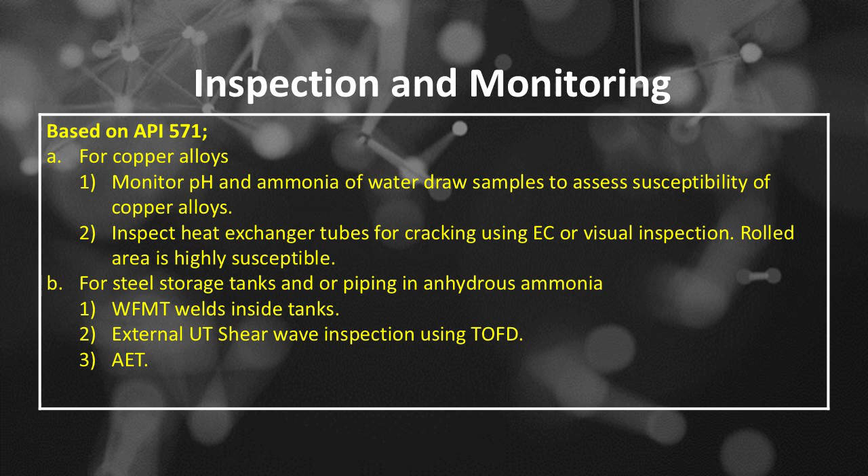Number B, for steel storage tanks and or piping in anhydrous ammonia. Number 1, WFMT welds inside tanks. Number 2, external UT shear wave inspection using TOFD. Number 3, AET. Here's a detailed explanation of inspection and monitoring methods used to detect ammonia stress corrosion cracking damage.

Inspection and monitoring methods for detecting ammonia stress corrosion cracking, SCC, damage. Number 1 is visual inspection. It is purposed to detect surface indications of cracking, corrosion products, or leaks.

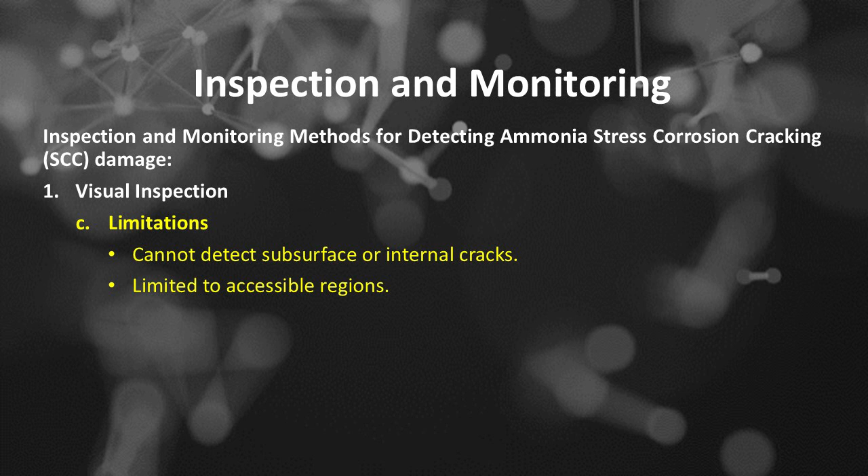Inspection and monitoring method number 2 is ultrasonic testing, or UT. It is purposed to detect internal cracks, especially intergranular SCC, and measures crack size and depth. The first UT method is called pulse-echo ultrasonics, which sends high-frequency sound waves into material, where reflections indicate flaws.

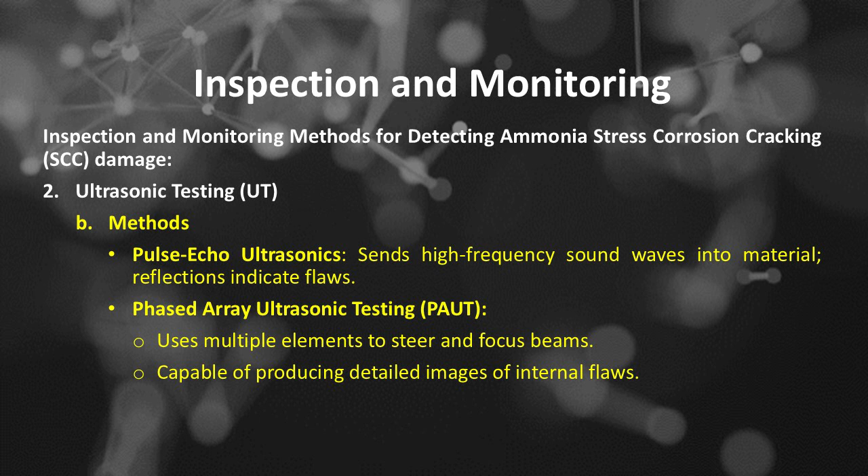The second UT method is phased array ultrasonic testing, or PAUT, which uses multiple elements to steer and focus beams, capable of producing detailed images of internal flaws. The third UT method is time-of-flight diffraction, or TOFD, which detects small cracks by analyzing diffracted signals at crack tips.

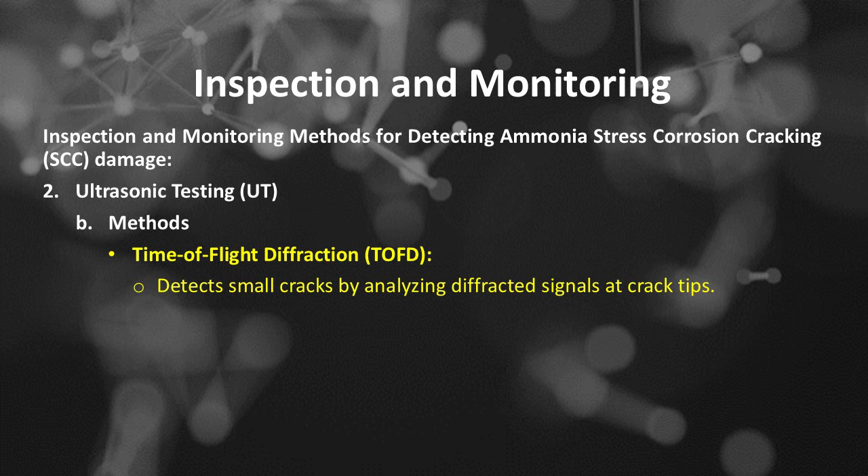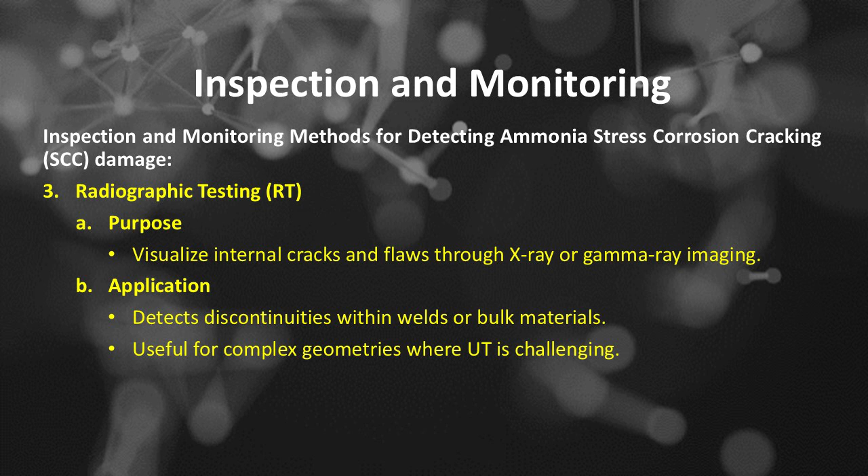Number 3 of inspection and monitoring methods for detecting ammonia stress corrosion cracking damage is radiographic testing, or RT. This is purposed to visualize internal cracks and flaws through X-ray or gamma-ray imaging. RT is applied to detect discontinuities within welds or bulk materials, and is useful for complex geometries where UT is challenging.

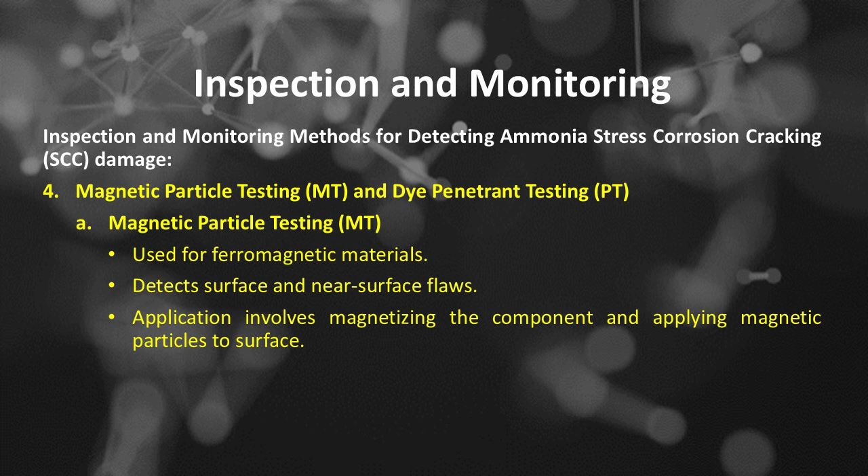Number B, dye penetrant testing, or PT, used to detect surface breaking cracks. To perform dye penetrant testing: the surface shall be cleaned, dye penetrant is applied, excess removed, then a developer reveals indications. Limitations of dye penetrant testing are that it's only for surface breaking cracks and not effective for internal SCC.

Number 5 of inspection and monitoring methods for detecting ammonia stress corrosion cracking damage is acoustic emission monitoring. It is purposed to detect rapid release of energy from crack growth, and is suitable for continuous or periodic monitoring. Application involves sensors placed on the equipment surface that detect transient elastic waves, capable of identifying active crack growth during operation.

The advantages of acoustic emission monitoring are real-time monitoring and sensitivity to dynamic cracking events. The limitations are that it requires complex data analysis and can be affected by noise from other sources.

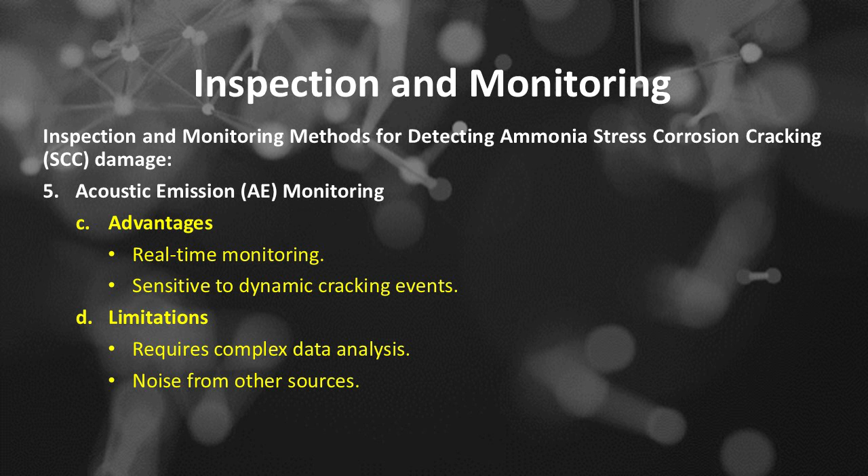Number 6 of inspection and monitoring methods for detecting ammonia stress corrosion cracking damage is electrochemical inspection techniques. Number A, potential monitoring, includes measuring corrosion potentials to assess corrosion activity, and use of half-cell potentials for localized corrosion detection.

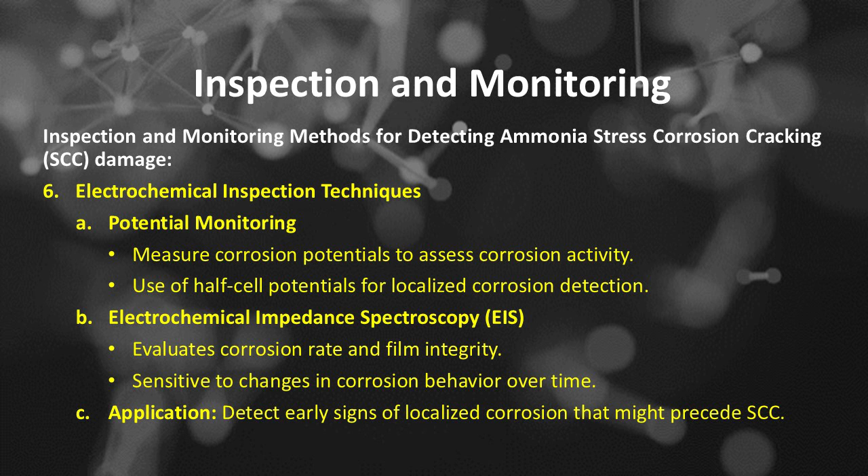Number B, electrochemical impedance spectroscopy, used to evaluate corrosion rate and film integrity. It is sensitive to changes in corrosion behavior over time, and its application is to detect early signs of localized corrosion that might precede SCC.

Number 7 of inspection and monitoring methods for detecting ammonia stress corrosion cracking damage is advanced and specialized methods, including number A, replica techniques: use of replica films or impression materials to capture surface features, analyzed under microscopes for crack initiation evidence.

Number B, infrared and thermal imaging, detects anomalies in thermal signatures indicating corrosion or cracking. Number C, digital image correlation, DIC, a strain measurement technique to detect surface deformation indicative of subsurface cracking.

Number 8 of inspection and monitoring methods for detecting ammonia stress corrosion cracking damage is monitoring strategies, including number A, regular scheduled inspections: follow industry standards such as ASME and NACE, and use appropriate methods based on component accessibility and risk.

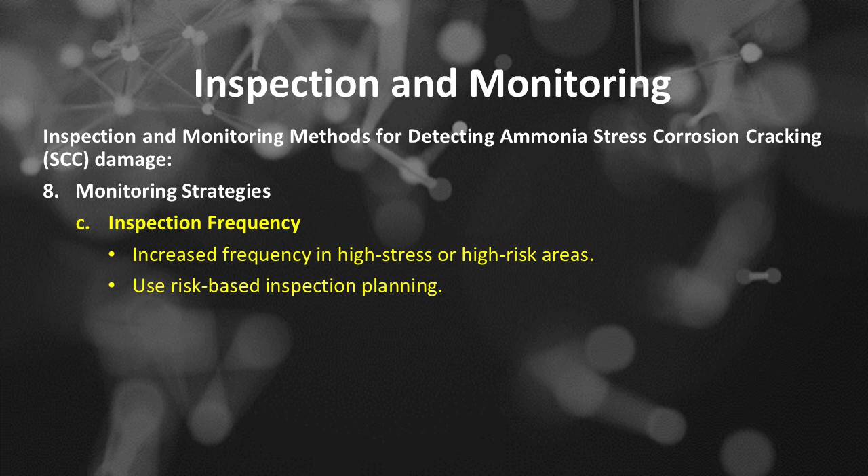Number B, continuous monitoring: install sensors such as AE and corrosion potential probes for real-time data to enable early detection of active crack growth. Number C, inspection frequency: increase frequency in high-stress or high-risk areas, and use risk-based inspection planning.

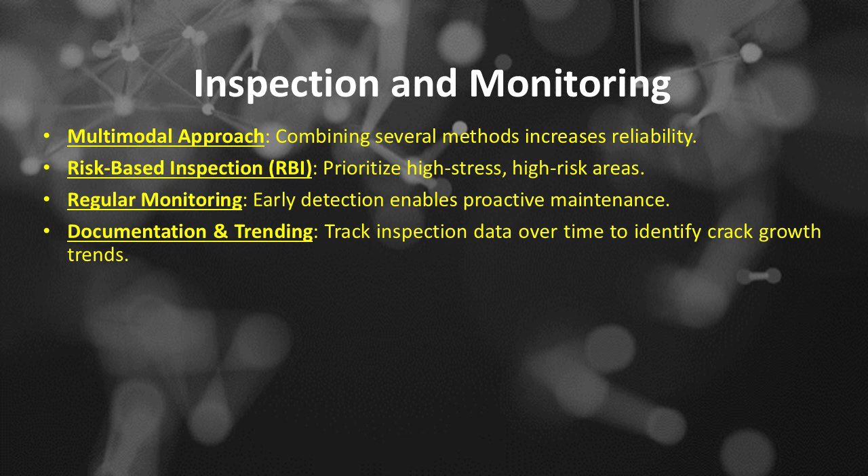A multimodal approach combining several methods increases reliability. Risk-based inspection, RBI, prioritizes high-stress, high-risk areas with regular monitoring. Early detection enables proactive maintenance. Documentation and trending track inspection data over time to identify crack growth trends. Thank you.